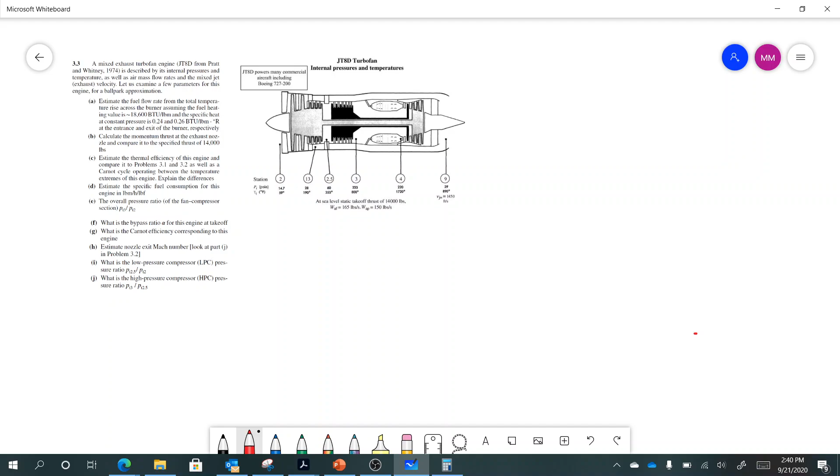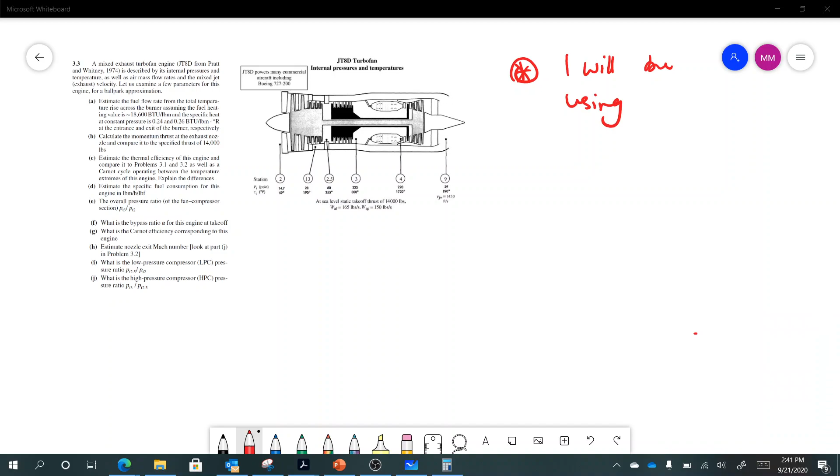So what I did was I went back and talked to the author of the book, and he reached out to me. We talked a little bit, and we were able to clear some of the confusions. But again, as I have stated before, I will be using SI units first of all. Or if not SI, I will be using consistent units in any questions you may get, right?

So this is the first thing, but you want to be able to solve the book problems as well, and you want to make sure that you are correct in solving the problem. So most of the issues we have had is with the unit conversion, as well as these two parameters that we have here, WAF and WAP. We had the discussions in class. Each of us had their own opinion, and I'm going to address those right now.

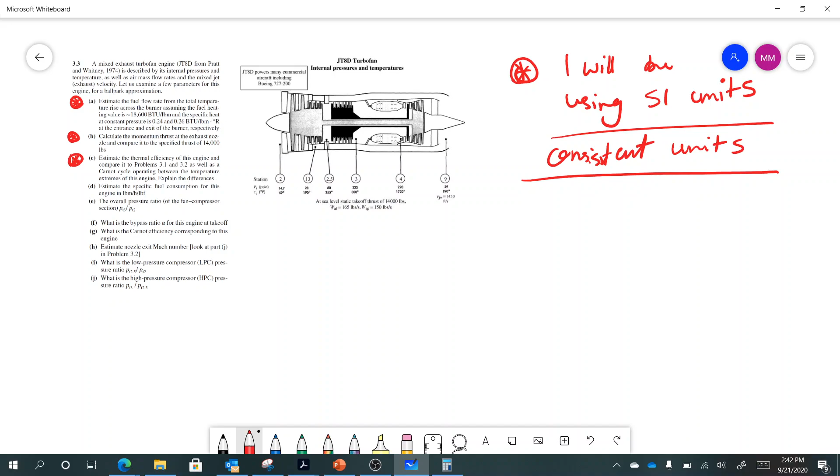And we are going to solve part A, part B, and part C of problem 3.3 of chapter 3. Not together, I mean, I'm going to solve it for you. If the confusion still remains, reach out to me if you were still confused or if you had any other questions.

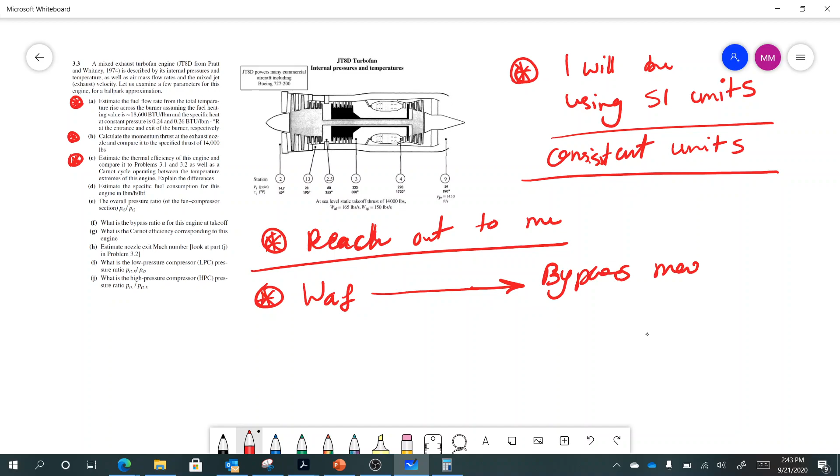Okay, so first of all, let's address this mass flow rate controversy that we have had. I don't remember which one of you guys had this opinion, but one of you had the correct opinion that WAF is actually the fan. Let's call this W fan, the fan mass flow rate. Only the fan part, so the bypass. So in the terminology that we are going to use, this WAF is the bypass mass flow rate. Okay.

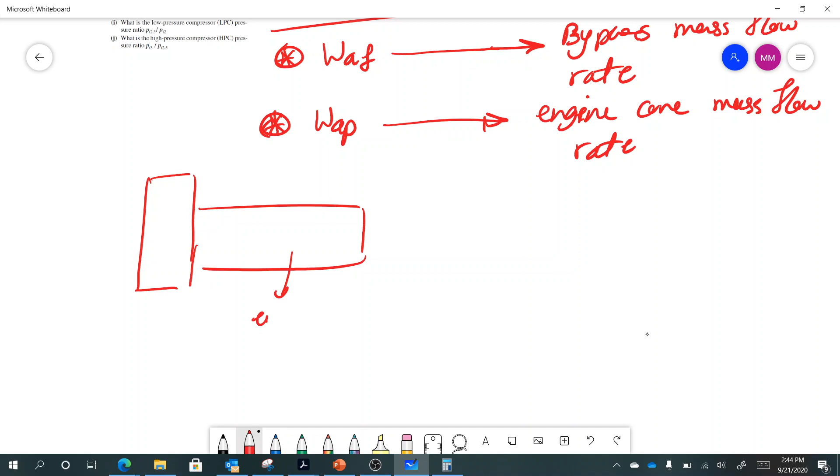And WAP is the engine core mass flow rate. Okay, so what does it mean? It means that, let's say you have this turbofan, you have your engine core here, that's where the compressor starts, compressor inlet, and the engine exhaust. You have the fan exhaust here,

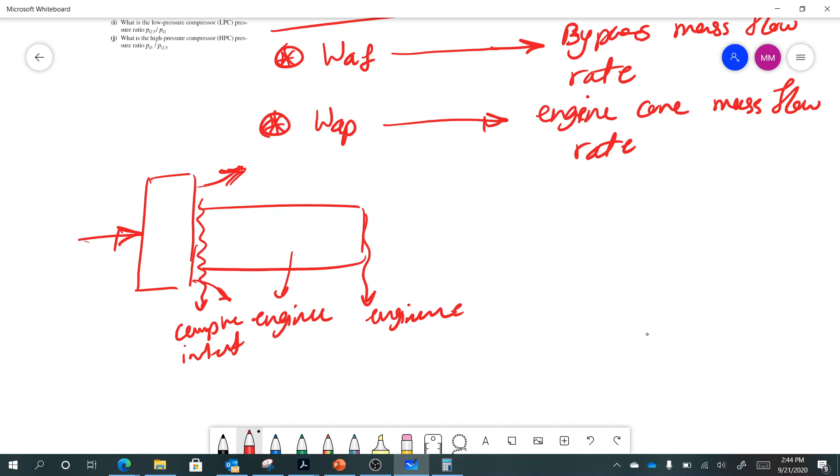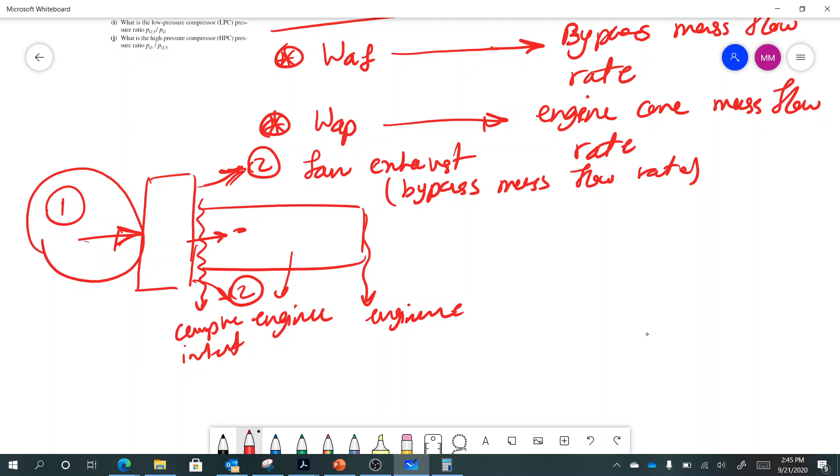and you have the total flow coming in. I'm going to call this total flow the fan mass flow rate, if you will. I'm going to call it number 1. Number 2 is going to be the fan exhaust or the bypass mass flow rate. And number 3 here is going to be the engine mass flow rate. So based on what we have discussed, this is going to be m dot 2. Okay.

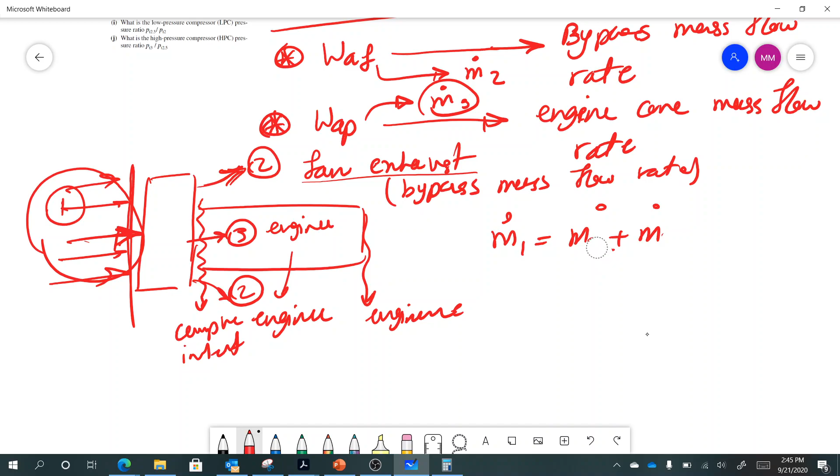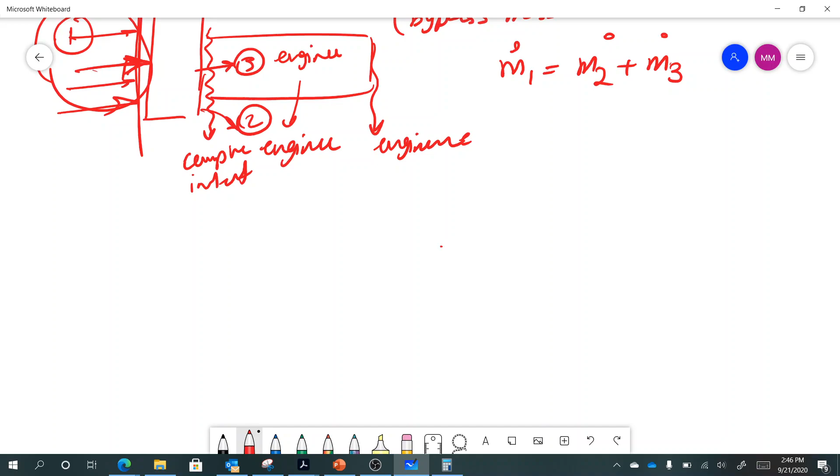WAF is your fan exhaust or the bypass mass flow rate. And this is going to be your m dot 3, engine mass flow rate. So the total mass flow rate coming in to your turbofan will be m dot 2 plus m dot 3. Okay. So this is part 1, and we are going to address the second part during the solution to this problem.

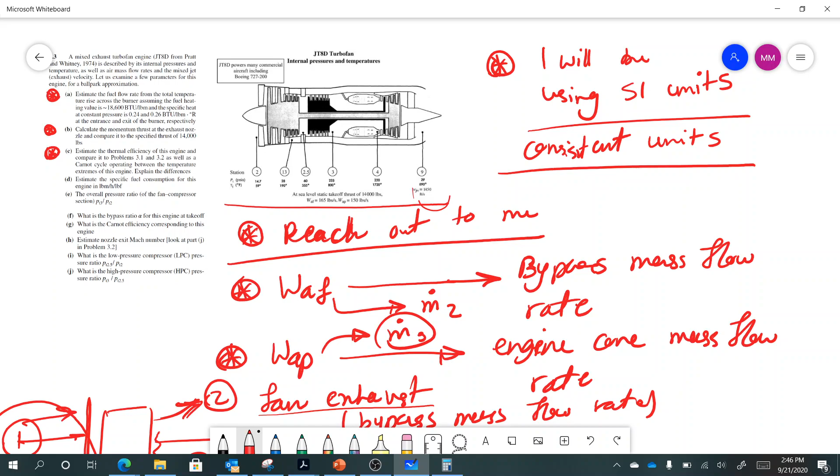So the problem is telling us that this turbofan is described by its internal pressures and temperatures as well as air mass flow rates and the mixed jet velocity, which we have here. And we want to examine a few parameters for this engine for a ballpark approximation. Okay, so keep in mind that this engine is a little different from what we have seen in the other problems.

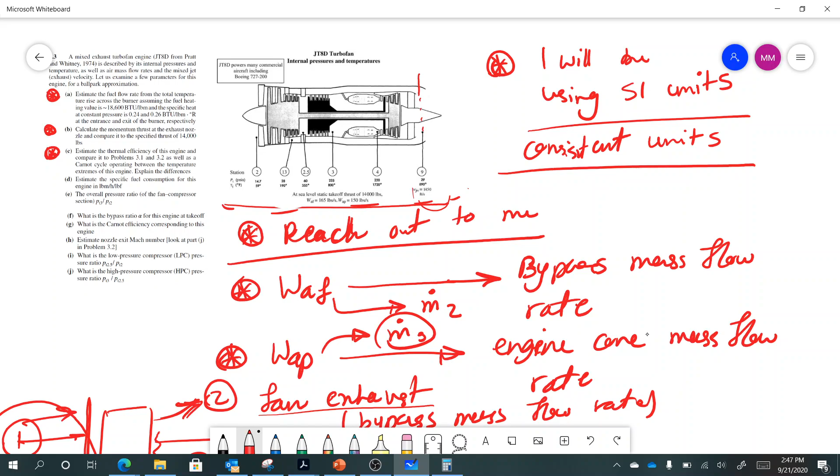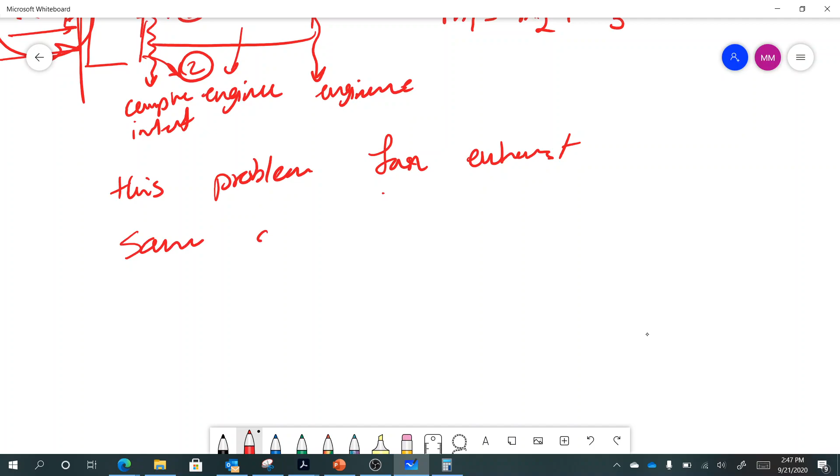In the other problems, your fan had a separate exhaust. Your fan exhaust was somewhere here, right? In one problem it was station 13, in another one it was station 19. But the fan exhaust in this problem is at the same station as the engine exhaust. Okay, so in this problem, fan exhaust same as engine exhaust.

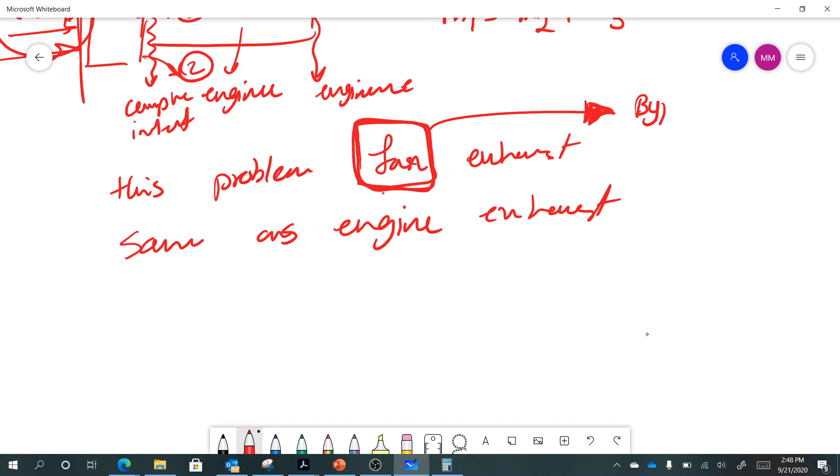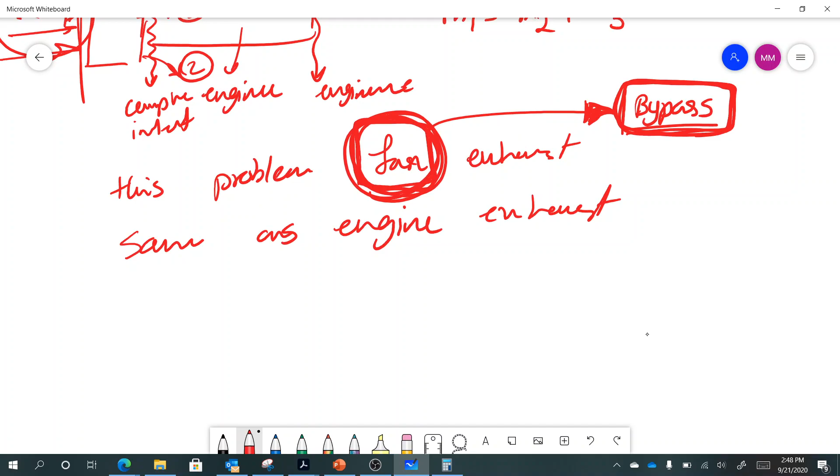Okay, and from now on, I know we decided on a different thing in the class, but let's change that. From now on, whenever we say fan, we are talking about the bypass. So whenever I use the word fan, this is what I mean, the bypass flow rate, right? It is highly possible for me to use it as the total mass flow rate coming into the turbofan, but if that was the case, please correct me in the class. I don't want to create any more confusions.

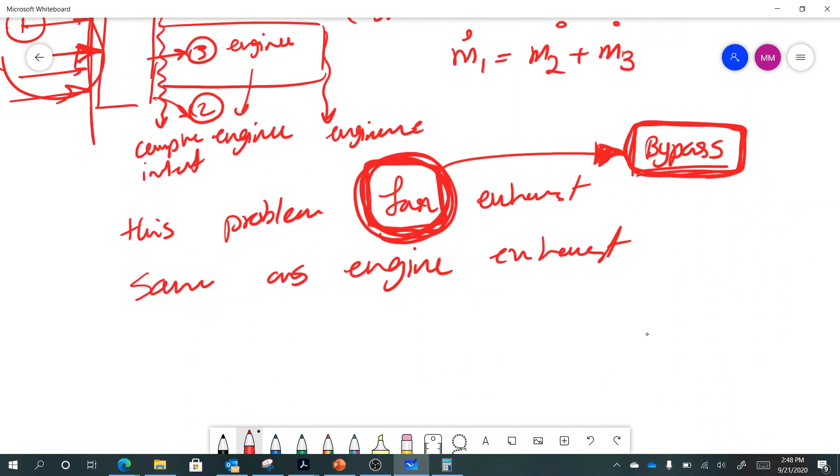Okay, so let's see what we are supposed to do. The first part is asking us to estimate the fuel flow rate from the total temperature rise across the burner, assuming the heating value is 18,600 BTU per pound mass, and the specific heat at constant pressure is 0.24 and 0.26 BTU per pound mass degrees Rankine. So we are essentially looking at station 3 and station 4 for part A. And this is where we have our QR put into the system. This is the combustor, this is the burner.

So if you want to write an energy balance for this case, it's going to look like this. We have the energy coming in, which is m dot naught, or m dot air, the core engine, multiplied by HT3. We subtract this from m dot naught plus m dot f times HT4. That's the energy at station 4, and this is the energy at station 3. It's going to be equal to changes in the internal energy. How do we calculate that? That's the heating value, QR, multiplied by m dot f.

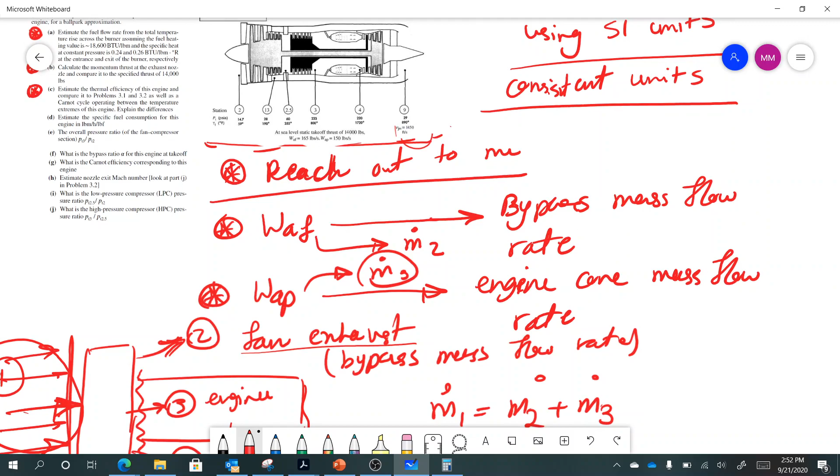Okay. The other thing, whenever you are dealing with British units in this book, I actually talked about this with the author of the book, and he basically told me that's how you deal with British units: you just have to be always mindful of the unit conversions. So Cp is given as BTU per pound mass degree Rankine, which is multiplied by degree Rankine for temperature, so these two cancel out.

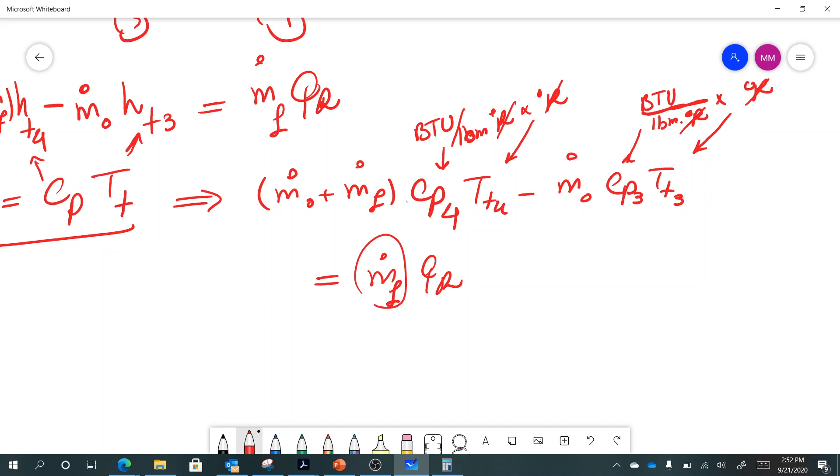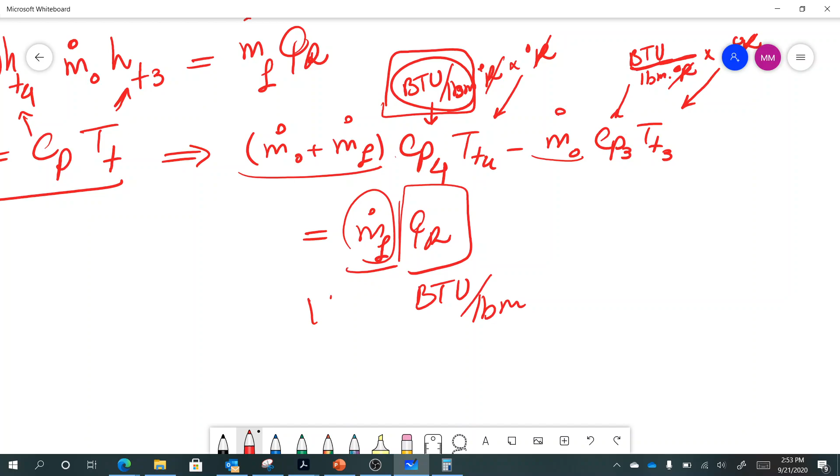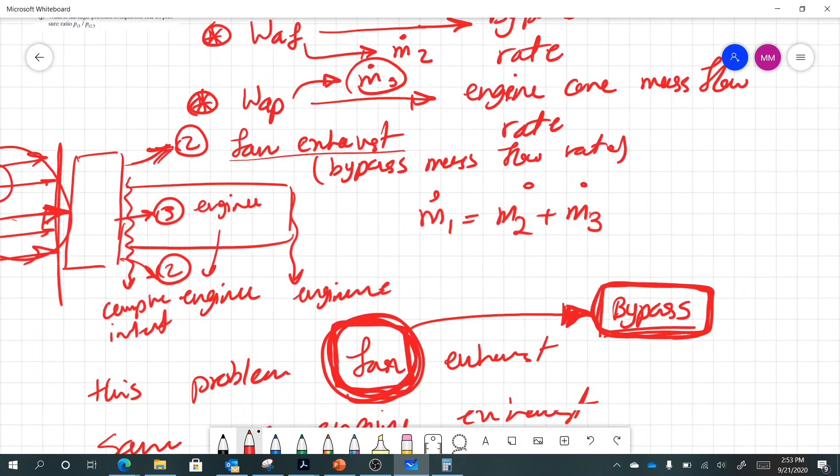And then it is multiplied by an m dot. But because we have the m dots on both sides with the same units, we don't really care about that. The unit on the left hand side is BTU per pound mass multiplied by the m dot unit, whatever that is, pound per second, pound per hour, it doesn't matter. So we should have the same exact thing on the right hand side, which we already have. We know QR is 18,600 BTU per pound mass. So the units are consistent.

But the other thing we can do to simplify this a little bit is to divide all sides of the equation by m dot o. m dot f divided by m dot o is going to be equal to f, the fuel mass flow rate to air mass flow rate ratio. So if you divide everything by m dot o, m dot o over m dot o is 1, m dot f over m dot o is f, m dot o over m dot o is 1, and m dot f over m dot o is f.

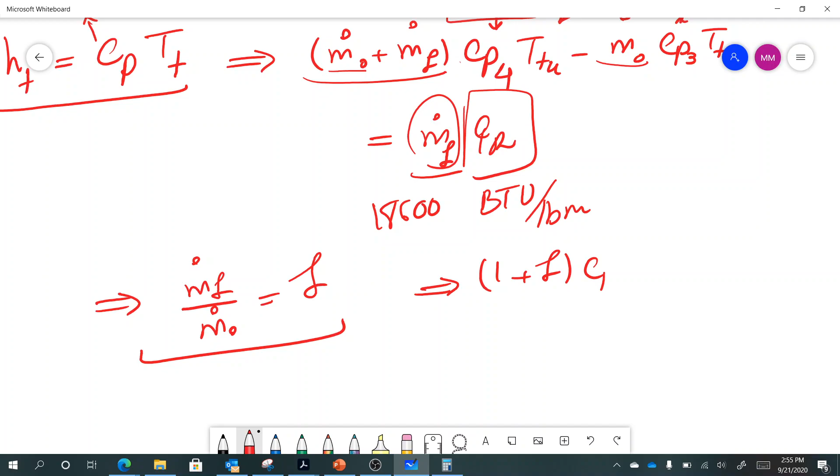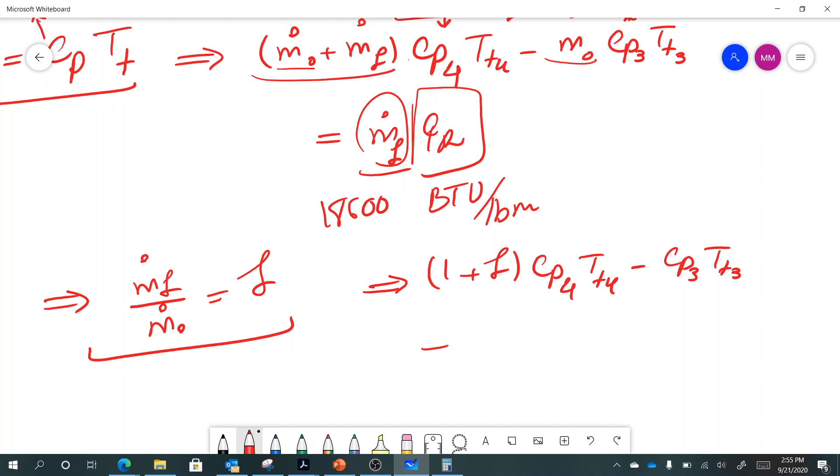So we are going to have (1 plus f) cp4 tt4 minus cp3 tt3 is going to be equal to f multiplied by qr. Okay, plug in the values: 18,600, cp4 is 0.26, cp3 is 0.24.

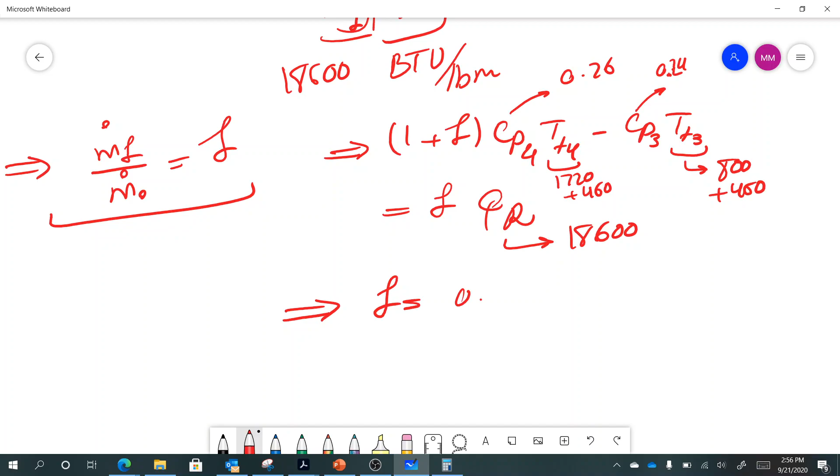For the total temperatures, we have them in degrees Fahrenheit. tt4 we have as 1720 degrees Fahrenheit. Just add 460 to convert it to Rankine. For tt3 we have 800. Just add 460 to convert to Rankine. So if you do the analysis, you are going to get f equals 0.0147. And this time I've done the calculations myself before posting the lecture, so I'm not relying on the solution provided by the author. So that's good.

This first part has asked us to find the fuel mass flow rate, right? To find the fuel mass flow rate, we have to go back to the definition of f, which was m dot f over m dot o. But the m dot o given to us is in this form, so we are essentially looking for w dot f over w dot ap. Okay, right here, which is 150 pounds per second. So 0.0147 equals w dot f over 150. So w dot f is going to be equal to 2.19 pounds per second.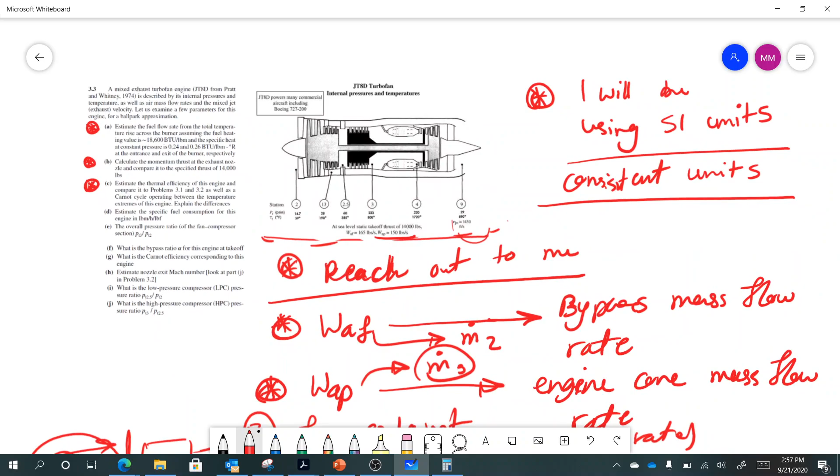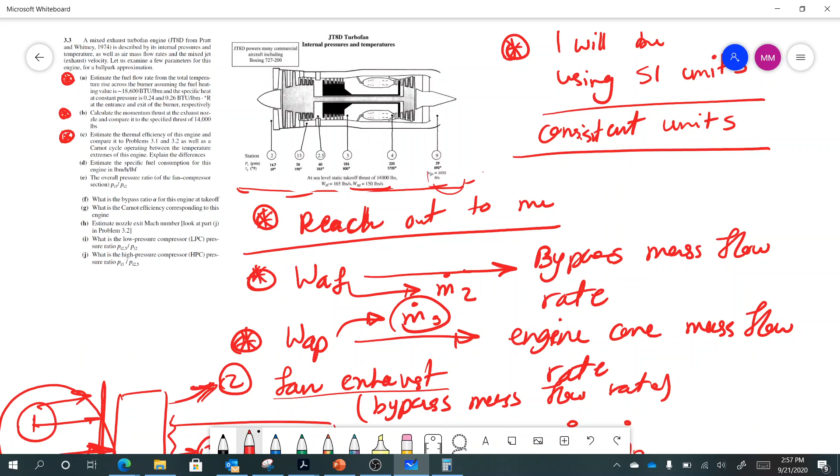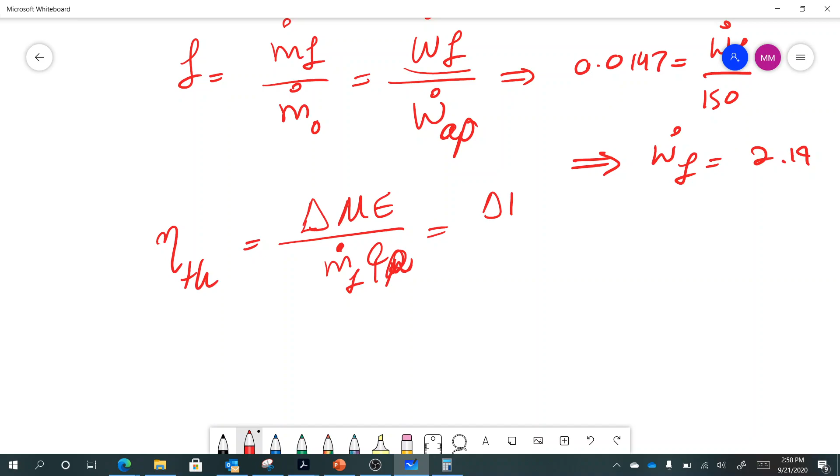Part C. Part C is asking us to find the thermal efficiency of this case. What we discussed in class was that thermal efficiency is essentially changes in mechanical energy over the input energy, which in this case is m dot f qr, right? Total input energy. Here we don't have any shaft information, so we just assume that the changes in mechanical energy that have gone to the shaft power are negligible. We just care about the kinetic energy, over m dot f qr.

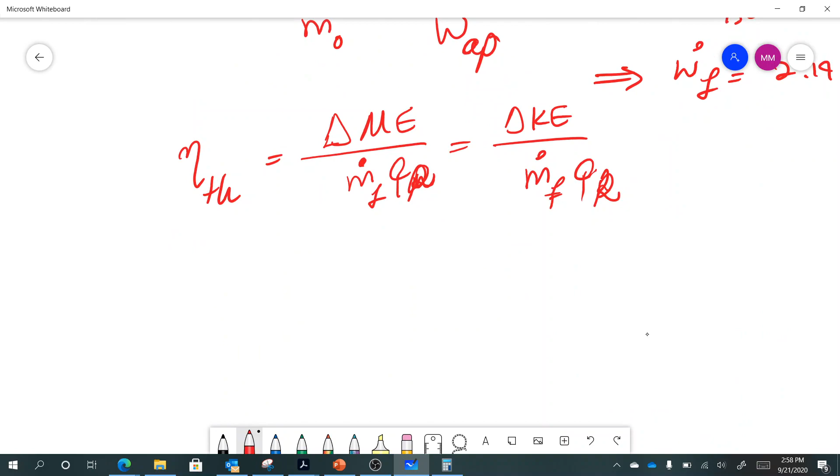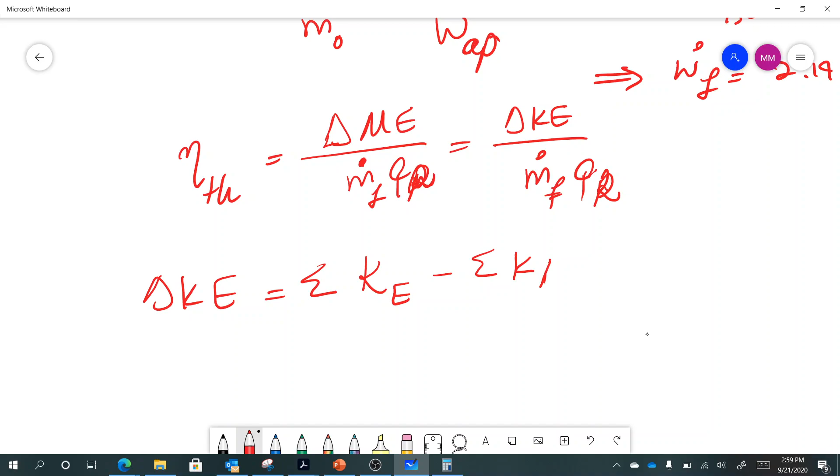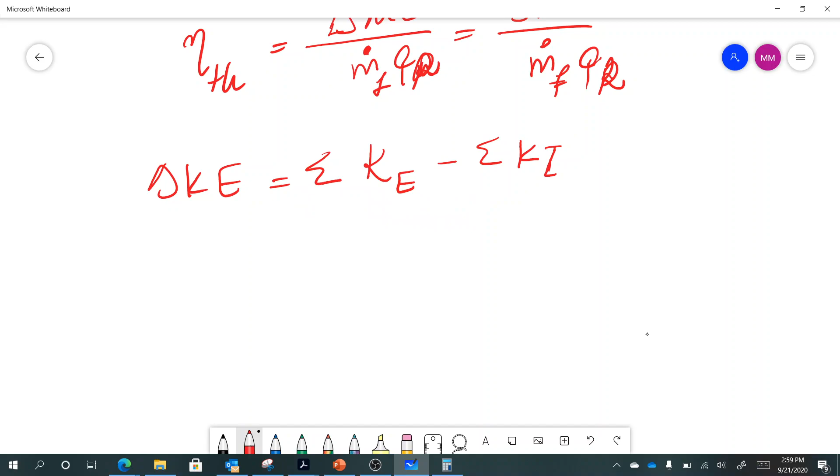So changes in the kinetic energy can be calculated by using the exhaust: sigma KE exhaust kinetic energy minus sigma KE inlet kinetic energy. This is a notation that I use; I haven't seen it anywhere, it's just for you guys to better understand. So what are the exhausts here? Let's go back to the engine. We have the engine exhaust right here. We also have, I'm going to use another color for this, the fan exhaust. And keep in mind that this is a circular exhaust, right? We have the fan exhaust as well, or the bypass exhaust.

The idea was, in this specific case, the exhaust velocity of the fan is V9, and the exhaust velocity of the engine is also V9. Okay. The exhaust mass flow rate of the fan is going to be W dot AF, 165. The exhaust mass flow rate of the engine is going to be W dot AP plus W dot F. So the exhaust kinetic energy is related to this mass flow rate and velocity, as well as this velocity and this mass flow rate.

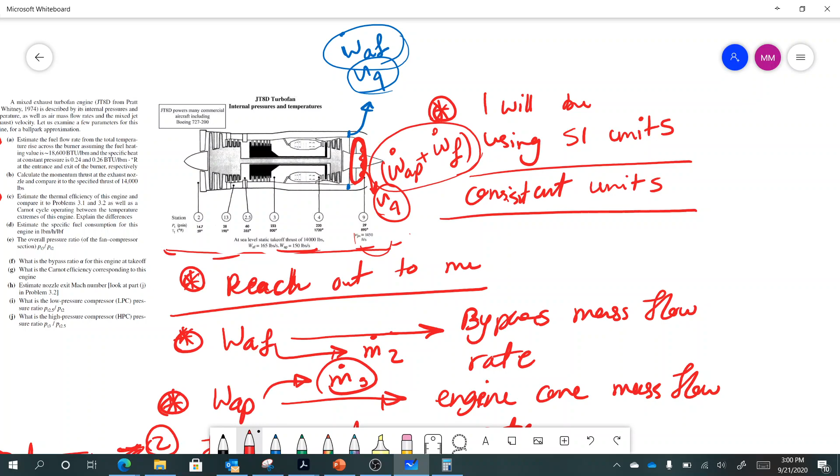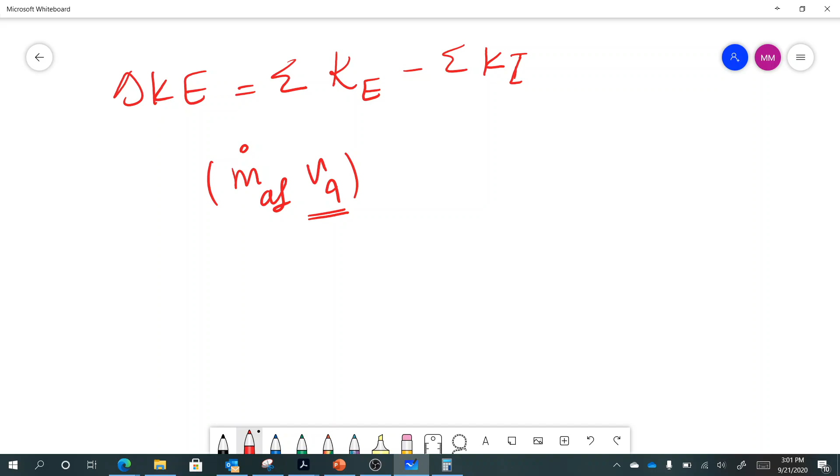So for the fan, or the bypass, we can write M dot AF V9. This is going to be your exhaust over there. And keep in mind, it is V9 only in this problem, because the exhaust of the fan was the same exhaust as the engine, and we are assuming that the velocity is going to be equal. It is not necessarily always the case, but in this problem we are saying that it is. Plus, this is actually W dot AP plus W dot F, multiplied by V9.

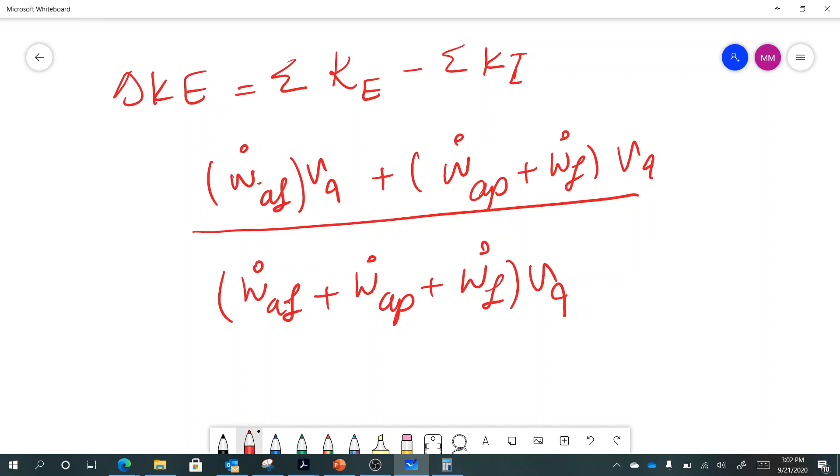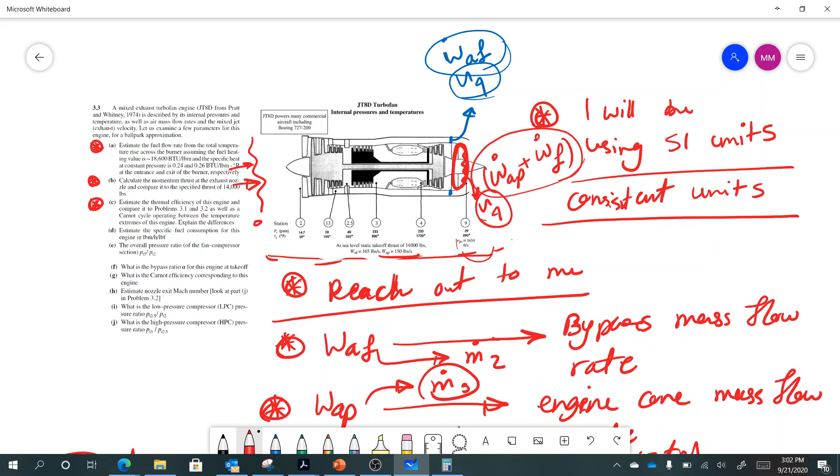We can actually rearrange this: W dot AF plus W dot AP plus W dot F, multiplied by V9, which is your exit velocity. But what is the inlet kinetic energy? The inlet kinetic energy is essentially whatever is happening here, at station 0, or station naught, right? So minus M dot naught multiplied by V naught.

Okay, what is this M dot naught? It is essentially going to be W dot AF, the fan or the bypass mass flow rate, plus W dot AP. Okay, so I hope this has solved the conflict. And keep in mind that we are assuming it's a perfectly expanded nozzle here.

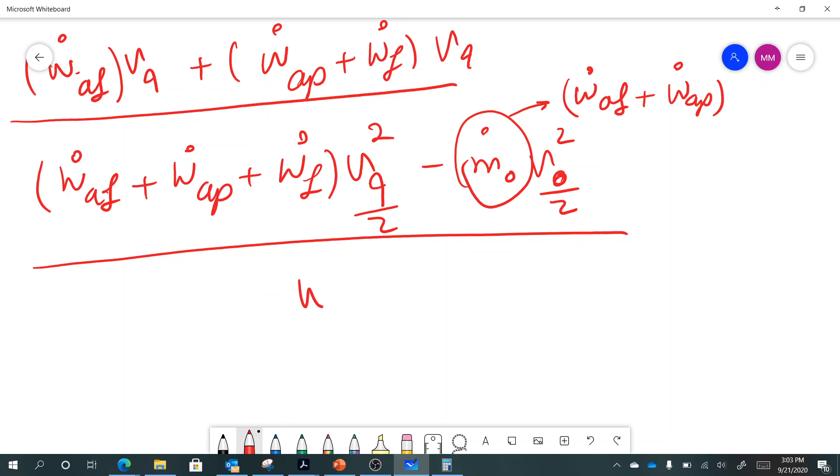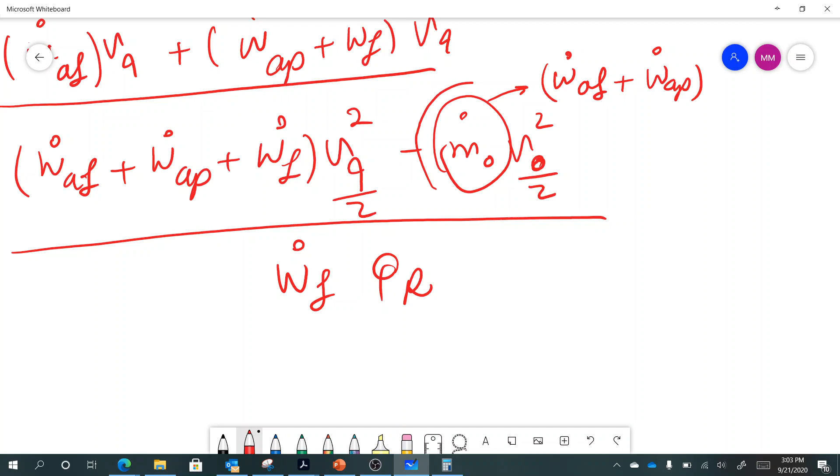And this is actually V squared over 2. The kinetic energy is V squared over 2. Okay. And then you just have to divide this by M dot F times QR, M dot F, which in this case is W dot F. Okay. So what you need to investigate, that is going to replace your quiz, is what to do with this problem, with this V, because we don't have V naught, right? What should we do?

The idea is if you have the total temperature and the static temperature and the CP, which you do have, you should be able to find a velocity. I remember in class, one of you brought up where you should find the CP. That's the CP of the air, so it is a standard heat capacity. But if you couldn't find the CP, please reach out to me. I will give you a value for CP at the sea level temperature, and then you can just use that in calculations. But you shouldn't have any problem finding this.

In an exam or a quiz, you will be given these parameters, right? So I won't expect you to go out there and find CP at the sea level temperature, unless that's the goal of the problem. But I don't see how this is going to be the point of a problem. So the idea is if you have the total temperature at station 0, static temperature at station 0, and CP at station 0, we are just going to call it CP, you should be able to find V naught, right? Based on the equations you have already seen. Okay.

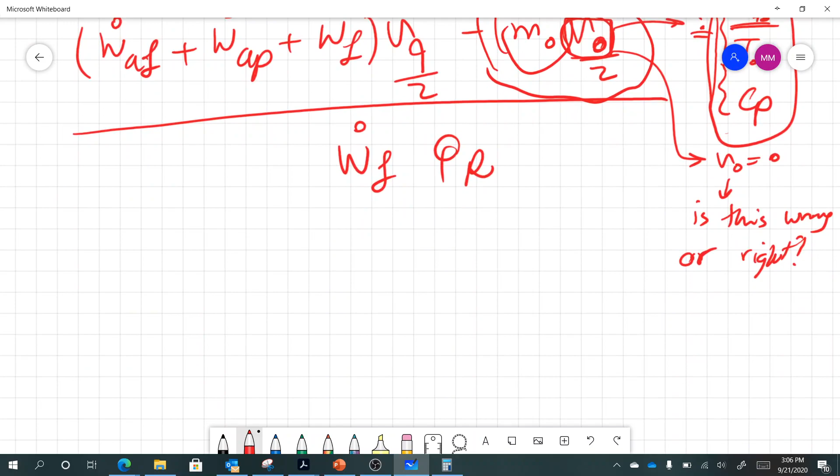And eventually you have to tell me whether it is a good idea to assume V naught is 0 or not. Is this wrong or right? Okay, that's the idea here, and I want you to be able to answer this question and back it up with some sort of a calculation, right? But the problem doesn't really end here. As I've mentioned, the biggest problem and the biggest confusion is the units that are being used here. Okay. So W dot F is actually pounds per second, right?

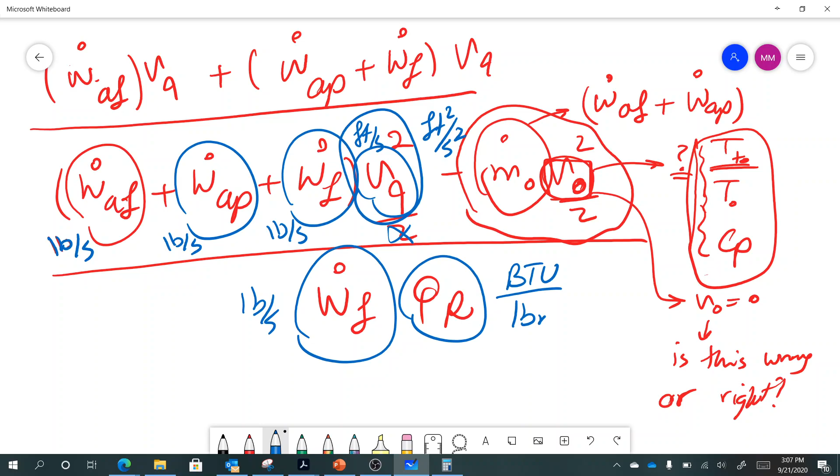So let me actually rewrite this here. Let me back up a little bit. This is pound per second. Let me use another color. Pound per second, pound per second, pound per second, and V is feet per second. This 2 is dimensionless, right? So V squared is feet squared per second squared. And this WF is pound per second. QR that we are given is BTU per pound mass, or BTU per pound. Okay, that's 18,600. This is what we are given.

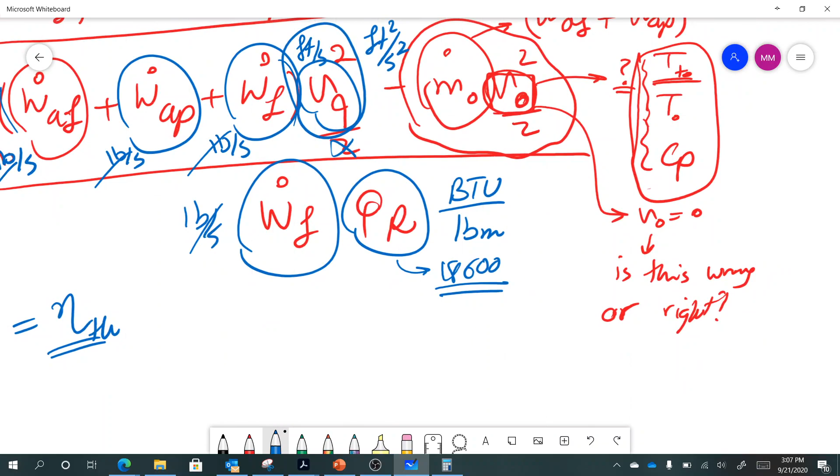Okay, so these units, this addition of units, they actually cancel each other out, right? We don't need to be concerned about those. And we want to get to a dimensionless parameter. Efficiency is dimensionless. So essentially, you just have to be mindful of the fact that on the numerator you have feet squared per second squared, and on the denominator you have BTU per pound mass, right? You have to find the conversion parameter. It is easy to look up online, but I'm going to give you this conversion parameter. So 1 BTU per pound is equal to 25,037 feet squared per second squared.

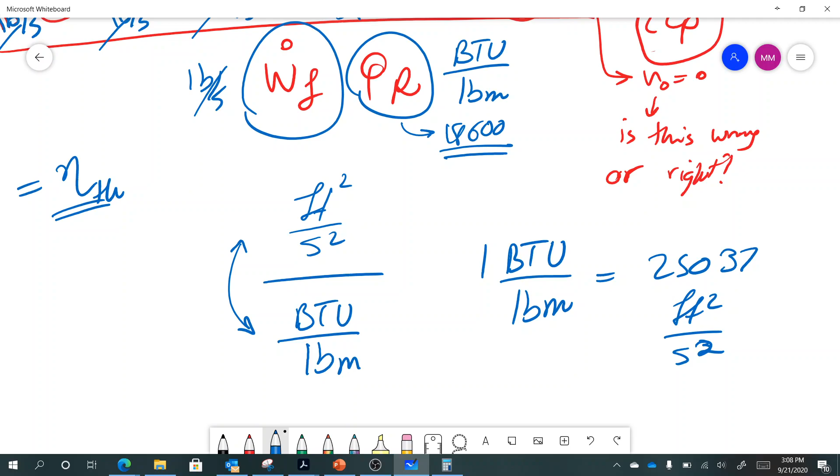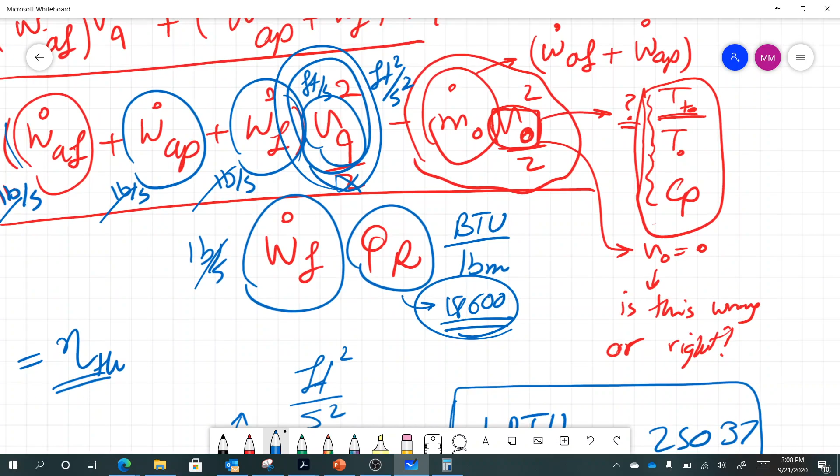Okay, you just have to make sure that you either transform this value to feet squared per second squared or transform this value to BTU per pound mass, and then find the efficiency. If you plug in the values and do the calculations, your efficiency should be somewhere around 32%, in that ballpark area. Okay.

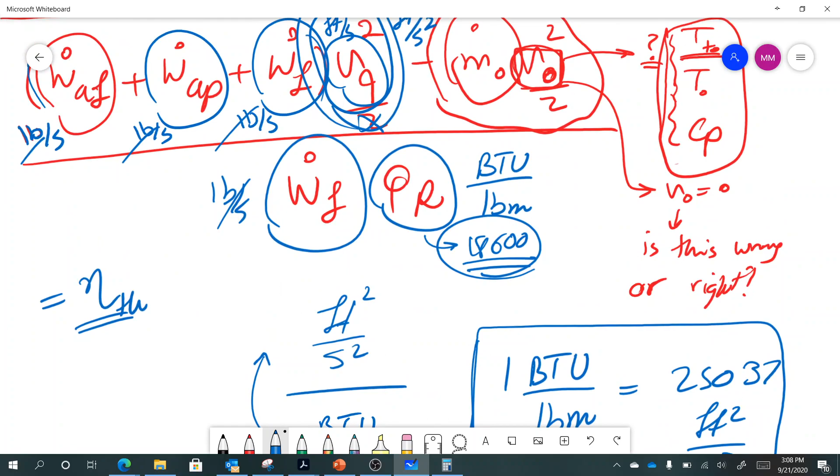So I hope this very small lecture has addressed all of the confusions. And I just want to keep it small.